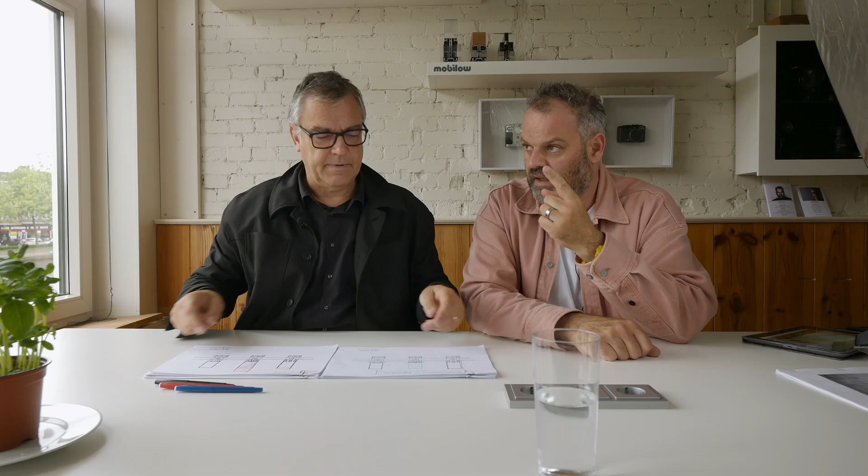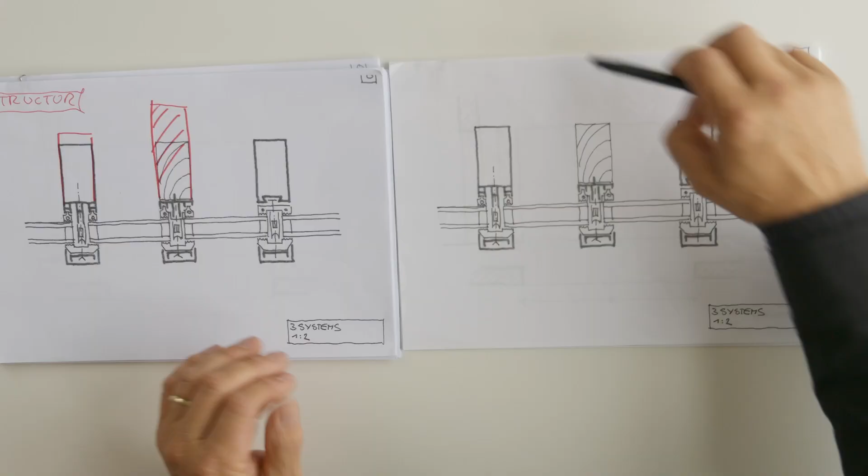And burglary. Burglary, precisely. And what I'd like to do now is take care of each comment they gave to us and get them into our final details. It's the updated version. And here we talked about the different systems, the aluminium, the timber and the steel system.

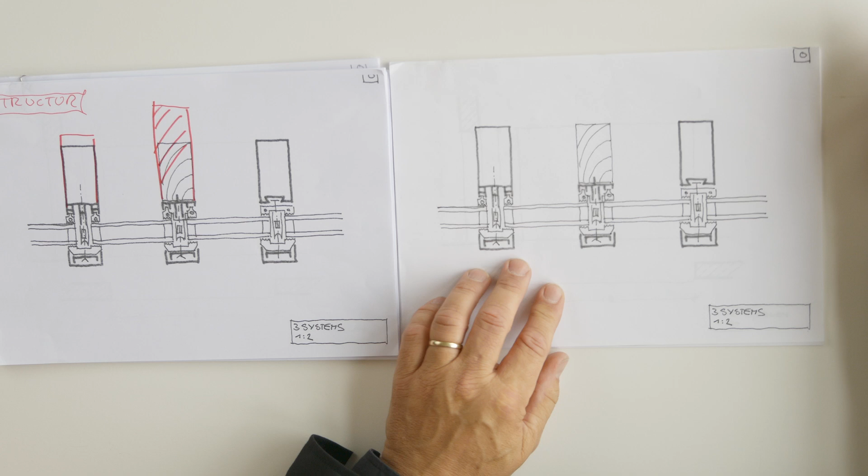And he was very clear saying steel is the narrowest, aluminium a bit wider, and timber would be the largest. And he also defined, okay, if you go into the catalogs, identify the height, 4 meters in our case, you end up with a certain dimension, which we may have to integrate. So when we looked at the catalog, we ended up with 15 centimeters. Good. 150 millimeters, perfect. Here we have a result, which is exactly what we wanted. We need this kind of feedback to identify what's the setup we are dealing with.

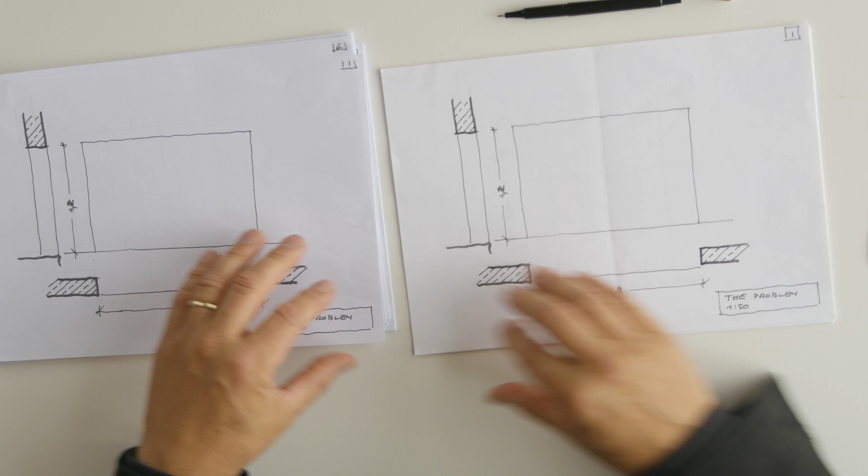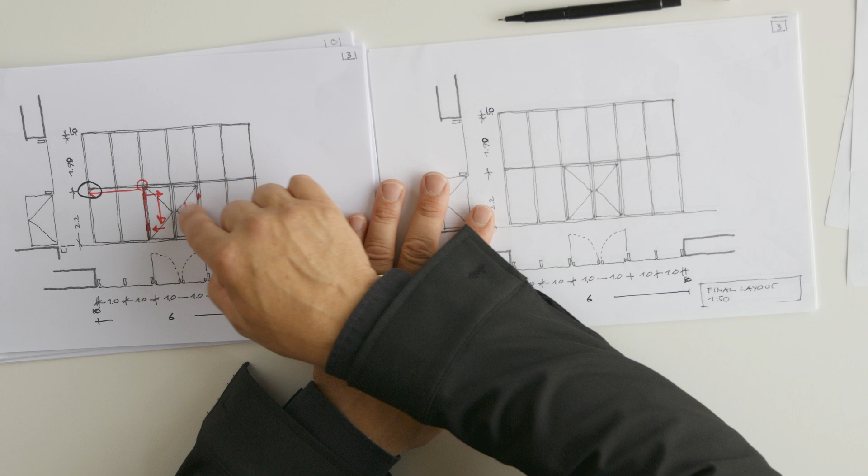Now, next, he didn't have any comments on the global geometry. Neither on the grid, precisely. Fine for him. We discussed the tolerances. He was absolutely okay with our choices of giving it some tolerances. And then, this was an interesting one, identifying where the loads find their way down. So down the loads from the doors, which is why we're going to have some kind of interlock here, which we see in a second.

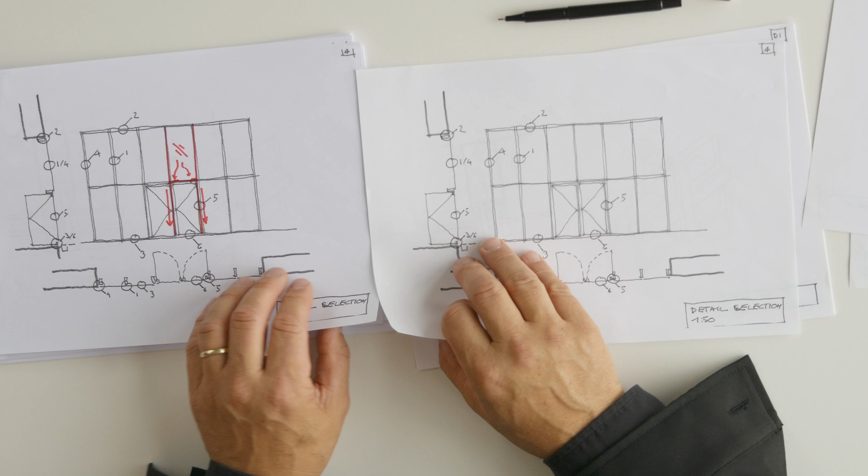And then we discussed also the weight of certain facade components, which means that weight from here needs to be transported and then down in the system, which we're going to see in the main facade detail in a second. Here we go. Well, that was an interesting one. Yeah. Go on.

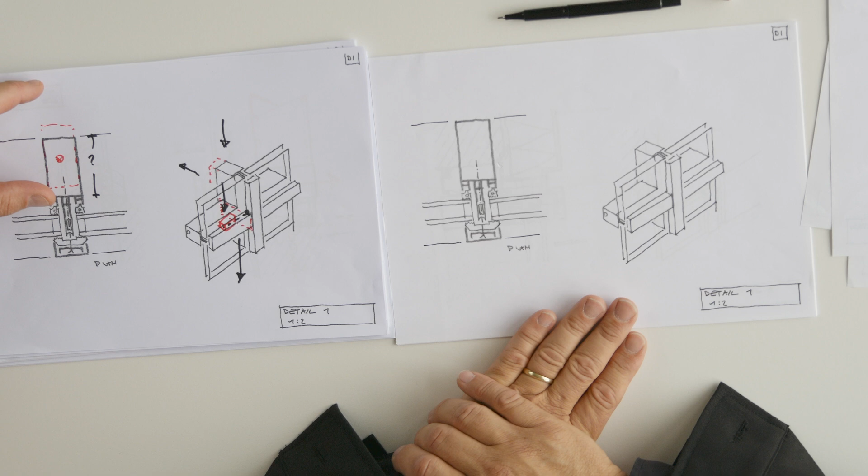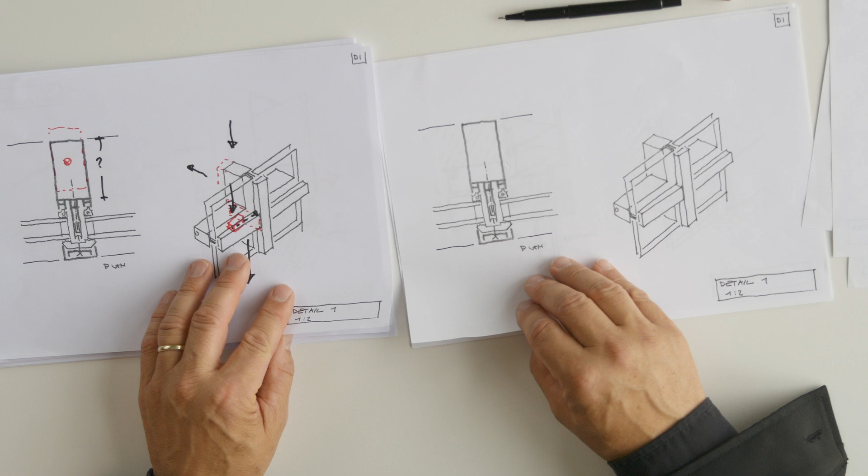Yes, the glass in principle is taking its load on these little glass blocks. They're not visible in the section. And then it also defines how deep the transoms or the mullions will be, to take deflection and deformation from the load of the glass. And then the interlock between horizontal and vertical components is again something which is solved within the system. So each system has a different kind of interlock, as we saw in the previous videotapes from the system suppliers. That's mainly it. Okay, no direct comment here.

Oh, this is upside down. Sorry for that. This was the top part. Interesting one. We discussed concrete may move versus facade being in position because of deformation of the building. We don't want the concrete giving its load to the facade. Erwin mentioned that it is dealt with by creating a sort of telescopic connection. So the mullion of the facade sticks out a little bit higher than the transom.

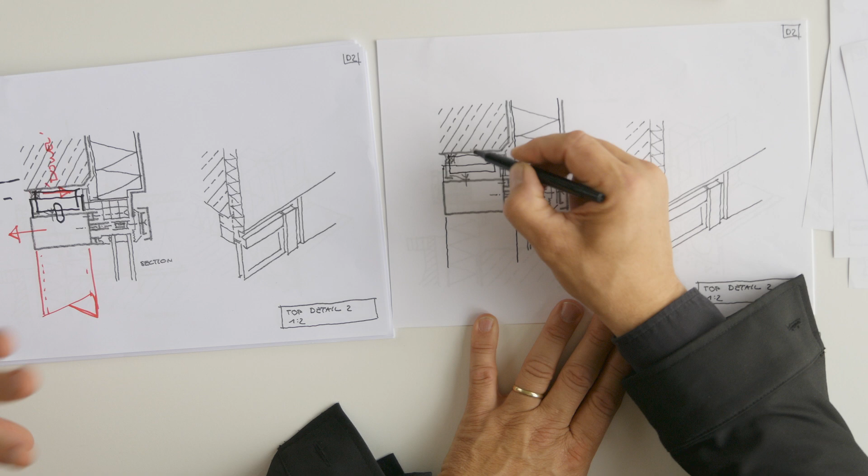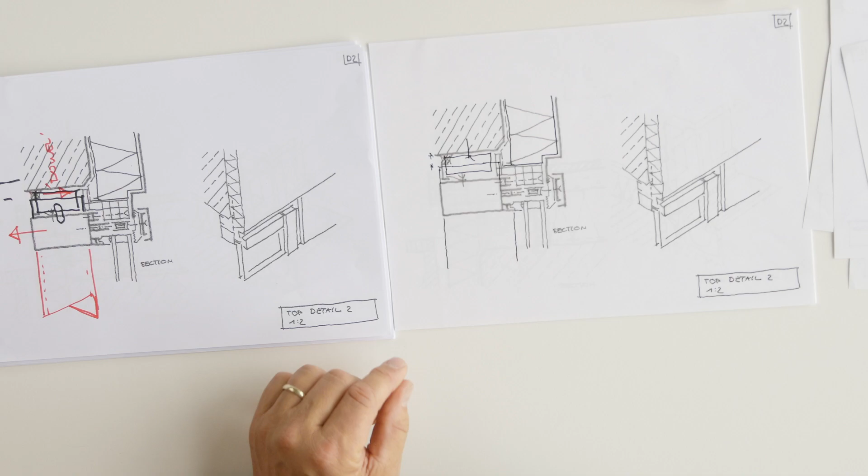And then there is a point that is attached to the concrete on top that grabs into the transom and secures the facade to not move inside or outside, but can actually allow movement from the beam on top or the opening of the building. So we have a certain dimension of tolerances possibly here, and then this is a dowel situation, as he named it. Yeah, a dowel, precisely. And this is a standing facade. And then on top it's a flexible joint.

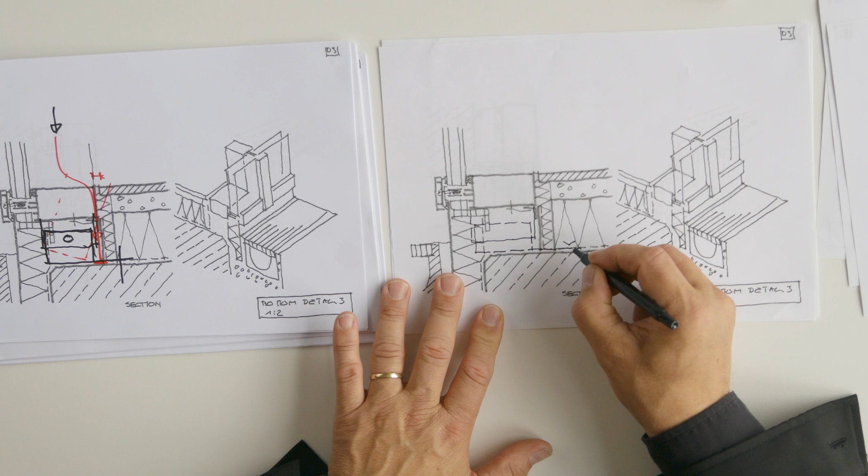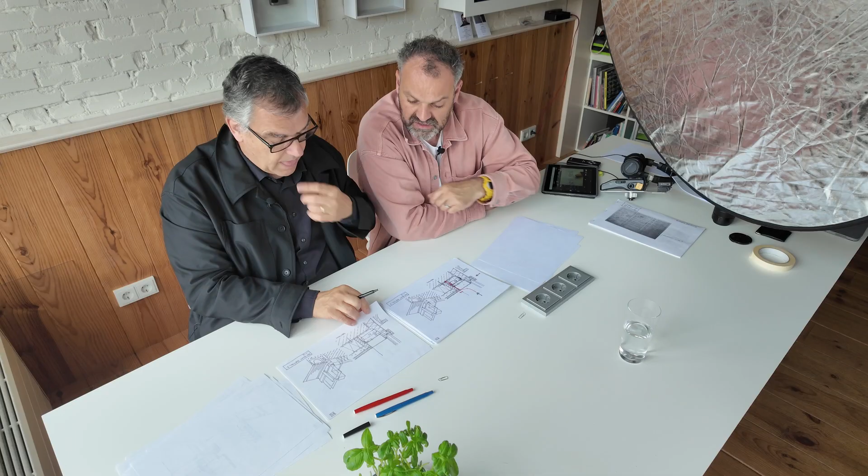Top flexible joint brings us to the bottom. It's the same here. The mullion actually extends a little bit over the transom, and then there's a steel shoe or a bracket fixed to the concrete floor, and that is then also secured permanently. There's no movement in this point. This is fixed. The facade stands on its feet on the concrete floor. Often in construction details they are dotted because they are only every now and then, let's say every meter or depending on the grid. And later on we will also hear from the expert that there needs to be insulation in there.

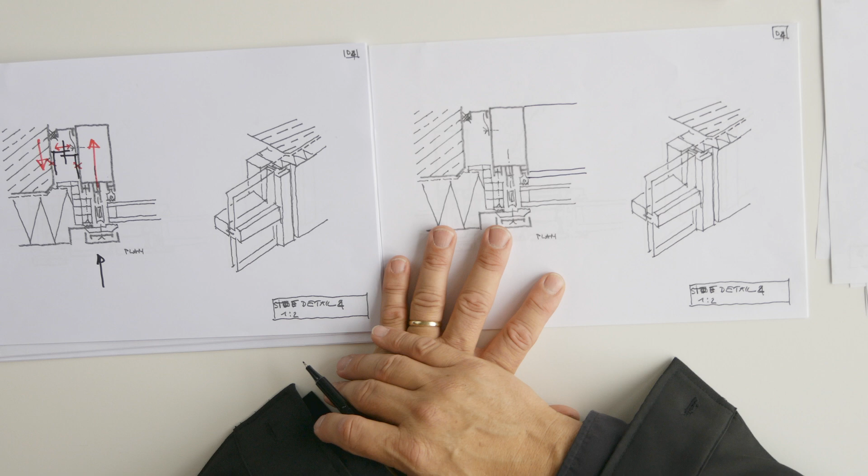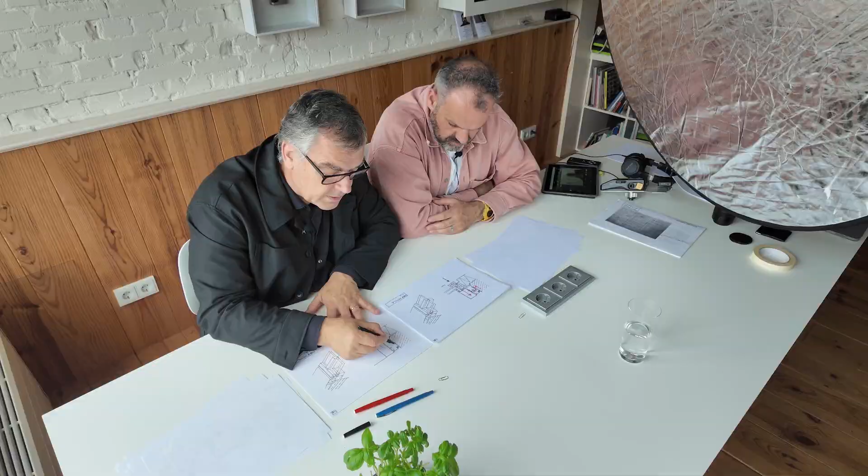This was the horizontal connection, so the horizontal stick system, which has its horizontal lines here, which is then, by the dowel, as we saw, delivering horizontal forces to this system. And he also argued that it's maybe necessary to secure that the facade itself is stiff and fixed to the outer wall. So what kind of material are we going to take here? Yeah, this is, I think, steel.

I would, for instance, leave that open to the facade contractor. They have their own systems. They prefer those systems from the system suppliers. But in general, a metal, steel L profile already does the job. Now it's in here, dotted again, because it's not going to happen continuously. It's going to be every meter.

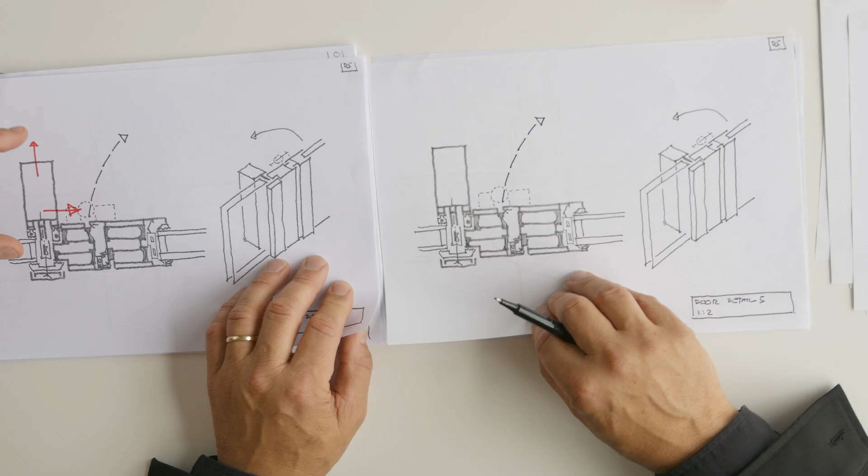Again, we talked about the forces and the consequences of this one, and then fixed this facade too. What was interesting is that he already mentioned, hey, take into account that often the door itself, with different parameters to be taken care of in the glass, may become heavier than the insulating glass units left and right of it. So therefore, make sure that the mullions of the facade can handle these loads, and often they will be defining the overall dimension. So make sure you already know which doors have to be integrated and which functions they have to fulfill. Which is what we did here.

Precisely. And then we end with this detail. No additional comments from this expert. Brings us to building physics. Yeah. So we do the same round again. Building physics, that's an interesting one.

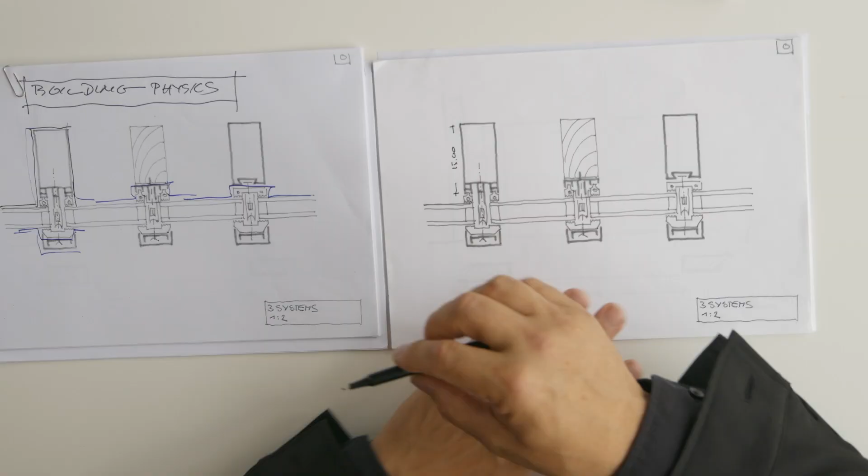So Alessandra evaluated our line of defenses, the inner one which is air tightness, the outer one which is rain tightness, and the middle one which is insulation. She was quite happy because the system provider already takes care of that. That's a standard detail, and therefore Schüco, in this case the system provider, took care of all of that already within the standard setting. Grid, no additional comments. Tolerances, no comments from her side.

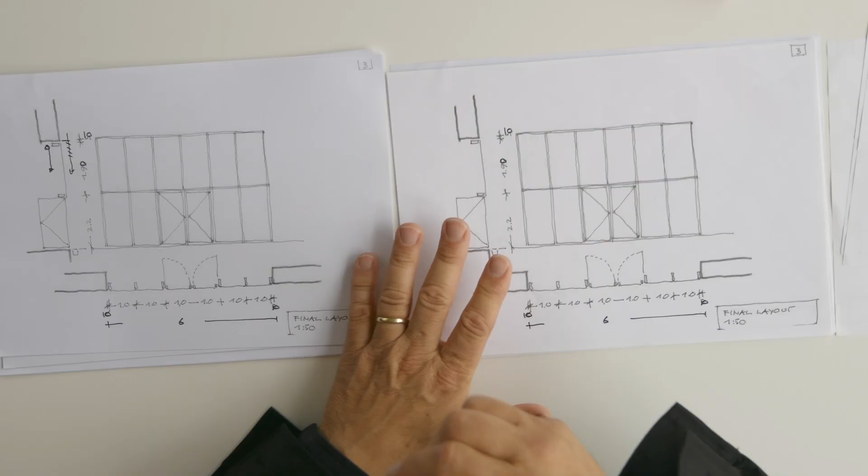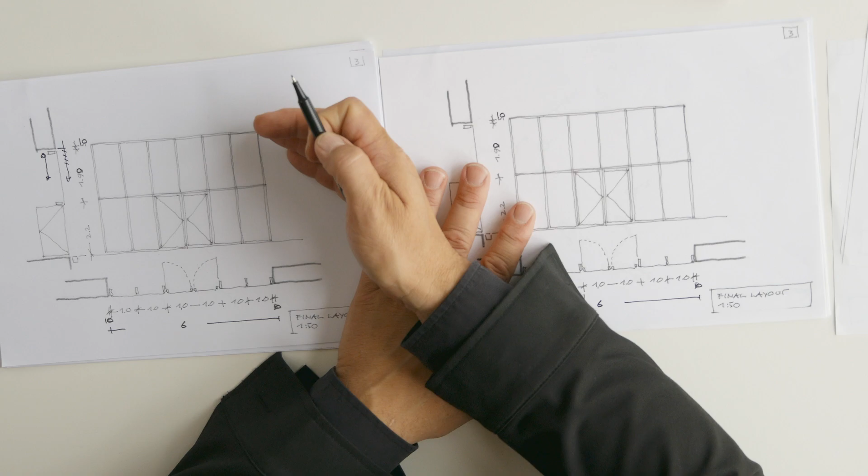Here we started talking about shading. We asked what kind of opportunities we would need to take into consideration for shading. The first one is having an outer shading system, which creates enough shade for the facade itself. She explained the values. An inner shading system has less potential to serve. But we also defined a Northern Hemisphere project, north-oriented facade. It's a north facade in this case. We don't need an exterior sunshade here. So we actually skip this complexity.

Yeah. But always make sure sun shading is a key part of the design of the building. And there's pros and cons for the various different systems. You have to make sure that you deal with that, otherwise you have problems later on with the climate concept. But it's not part of this lecture.

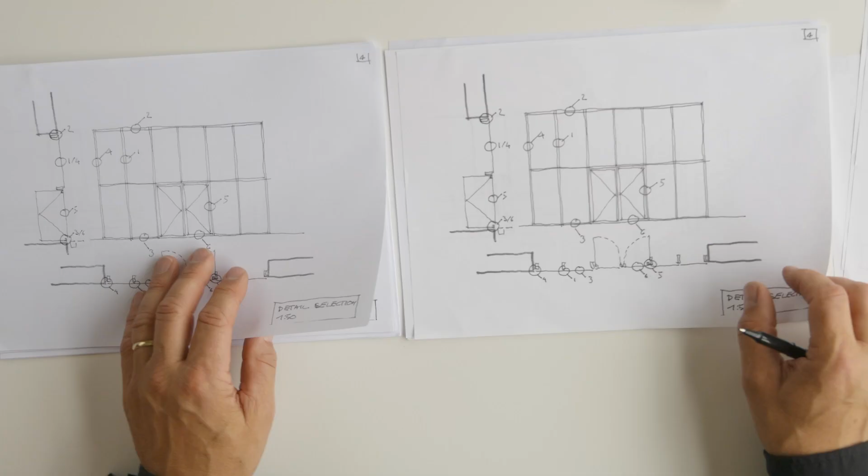I finished with this detail. Here we again talked about the shading, and she also came with the opportunity of having some kind of coatings depending on position. So if you cannot deal with a shading device inside, outside, movable or something, you may end up with a certain coating. That's what she was talking about in that interview.

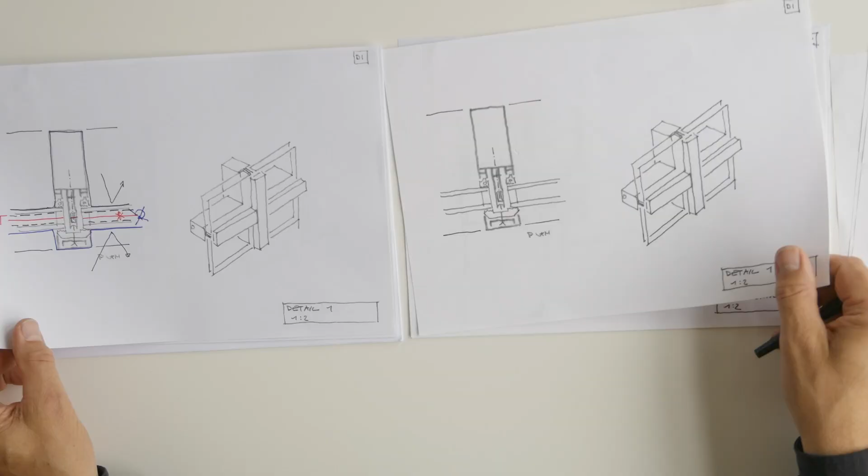Then we continued following the line of defenses. The inner one, correct. The outer one, correct. The red one, which is the one for securing thermal insulation as a setting. This was fine for her. She had no additional comments. Same for the bottom part. We had some discussion if we're going to fill this void or keep it open. We ended up keeping it open, but you may also fill this void, as this is the main insulation for the house.

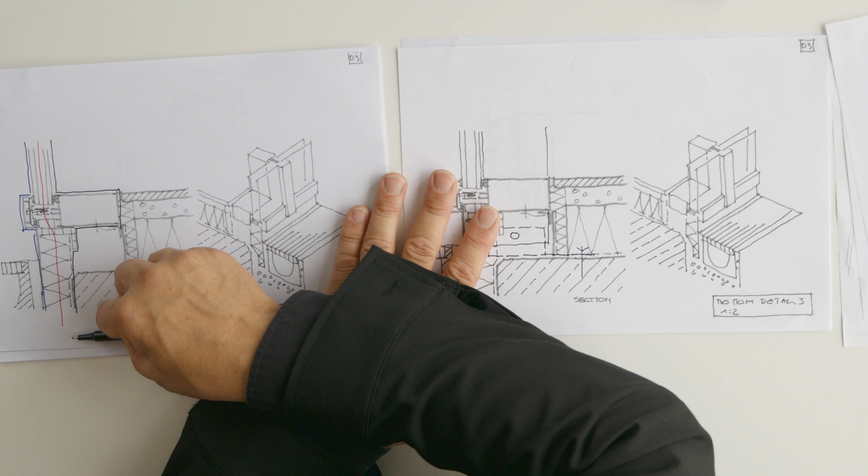What was interesting is she already mentioned within our little sketches of the details that brackets and systems provided by the system supplier to connect the facade to the building already take care of good insulation. You can see this in these various chambers. It's a plastic material which has a certain conductivity, but in this case it's perforated in order to make sure that it is as good insulating as possible.

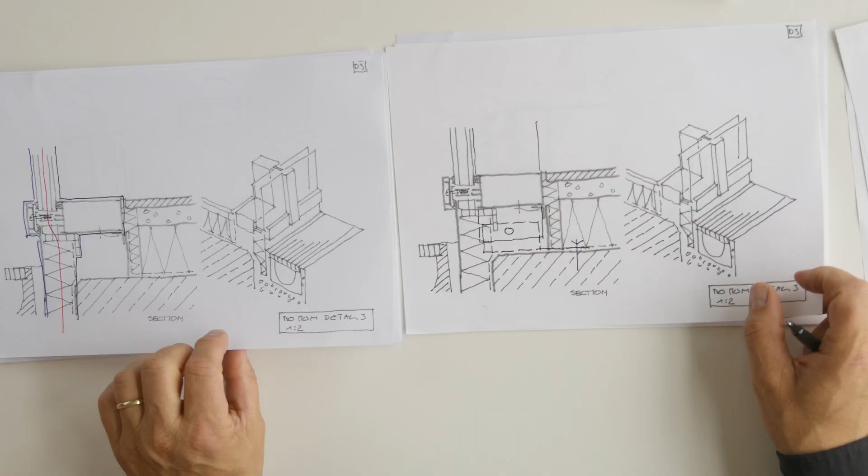No comments here. This was an interesting one when we were talking about acoustics for the facade. So we have this normal stick system with an IGU with 2 layers of glass. If acoustically this needs to be improved, we can go for different thicknesses for the glass itself, or even go for a triple IGU, which also helps to improve the U value. When you look at the details here, you see the size of the IGU. This could be a triple one. This is for sure 2 layers of an IGU.

So that worked nicely. And then for the door details, no additional comments from his side because we actually follow the system. So building physics, done, check. Quite interesting how many factors you actually have to take care of. That should be integrated from the very beginning in a description of the performances of the building. As we are teachers, luckily we didn't get that many serious comments.

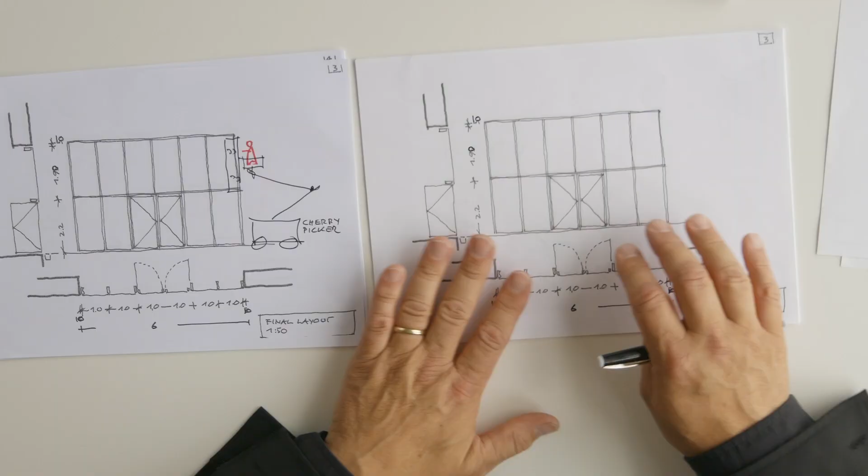Okay. Additional aspects: impact, construction at site, things like this. Again, Erwin, no comments to this, no comments to this, no comments to the general grid system. He did not have any difficulties with the tolerances. He was very happy with us having tolerances already integrated. And now how do we get this really installed? This was an interesting one. We discussed how do we do this.

So we have this opening, it's 4 meters high, no one will be able to get to the top part. You will need something to reach a certain height. A scaffolding system in front of it directly creates the problem of getting the glass units integrated. So he ended up saying, well, a cherry picker, so a device which moves in front of it.

Could also be a scissor lift, for instance, that is movable. But what he also mentioned was take care of the installment of the facade profile itself, the system, the stick system, and then also think about how to attach the glass, because it's different activities that have to happen, and also for the glass installment, they come with the special mounting system with the suction cups to put it in place.

Yeah, precisely. Important to consider that you need to have space in front of the facade, and it needs to be solid enough to allow certain accessibility, and the load-bearing field in front of the building often is still mud or something like that. Make sure you have to do something.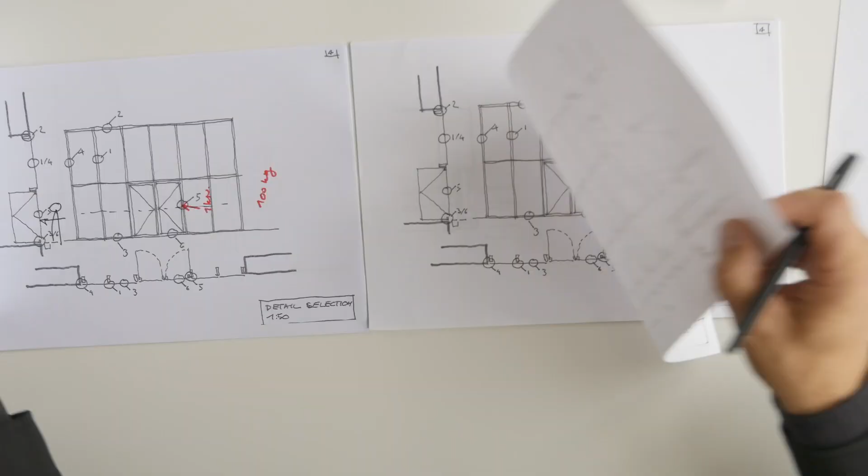Precisely. Then horizontal impact. We took the next drawing to do so, which means you have a person who's somehow bouncing into the facade. This is defined with 100 kilo horizontal impact, normally taken care of by the system. So again, a topic to be considered when you decide the system and when you go into the system descriptions, that you can identify that this is the load the system can actually accept.

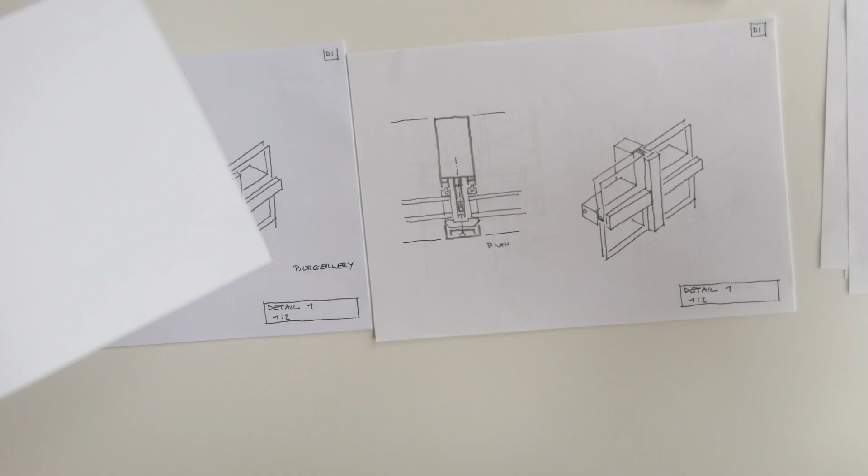Next one. That was an interesting one. Burglary. How do you get into such a facade? You actually can break every facade all the time. Yeah. And we learned the main topic is to make it complicated, so to delay the time people can break in. So he came up with alternative fixing devices.

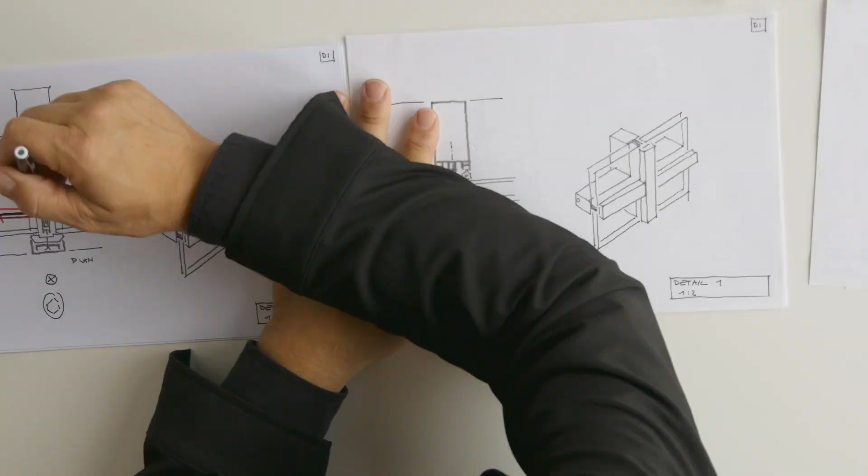So when we again look at this system, and we remember there's a screw in here, having different types of screws being positioned there, and if you don't want to break the glass, you may have laminated glass sheets which then are maybe even fixed to the system, not in this detail, but again, system suppliers deliver different qualities, different performances.

Well, I was wondering, we haven't talked about that, but a student recently asked me, what if the facade isn't strong enough, but you have to protect, for instance, an embassy? When someone drives into the building with a truck, how do you do that? Then you make a super heavy facade, or are there other ideas? At certain points there's a limit. So you cannot solve this within the facade system. So you have to find alternative solutions.

Like? For example, concrete blocks, solid structure in front of the building. So you make sure that the truck can't reach the facade. Okay, but then it stops here at the facade, then it's the landscape architecture who has to take care of that. That's absolutely correct. This is not our business in that respect.

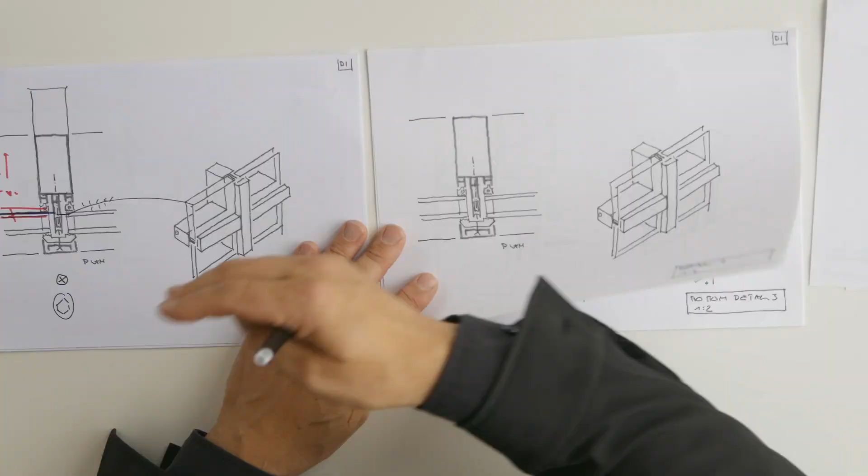We also did talk about bomb blasting. That's a different one. Here we want to have the facade being soft enough to, in case of explosion, take the impact. We defined for this project, it's not an embassy, so we're not going to take care of this kind of question.

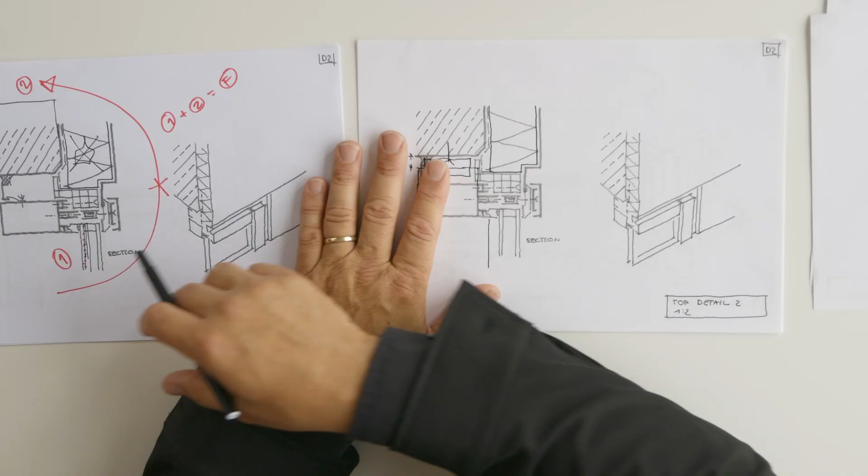Fire, another interesting one. We discussed the fire situation. Normally in low-rise buildings internationally, you can accept that there's a fire here, but you have to take care that the fire does not directly go up. If it is a high rise, you may have to do some additional measures. Normally we say kind of a meter distance in the parapet, for instance, concrete, that is able to withstand the fire. If it's a bit more advanced, you may also do a sprinkler here to cool down the fire outside.

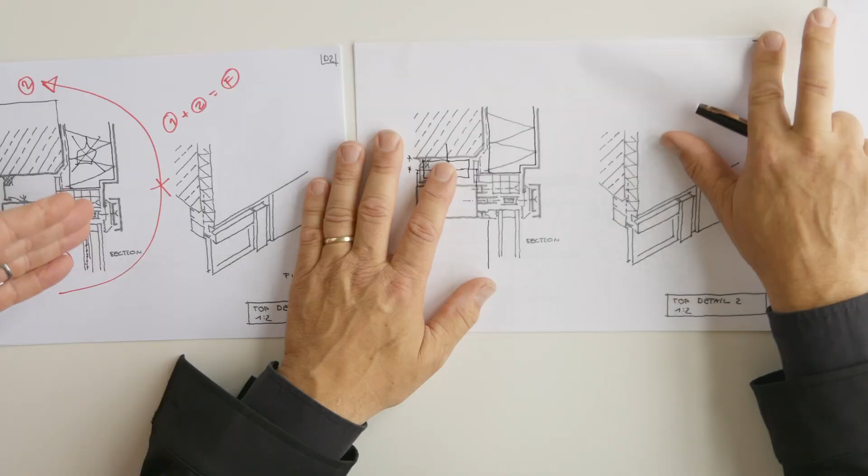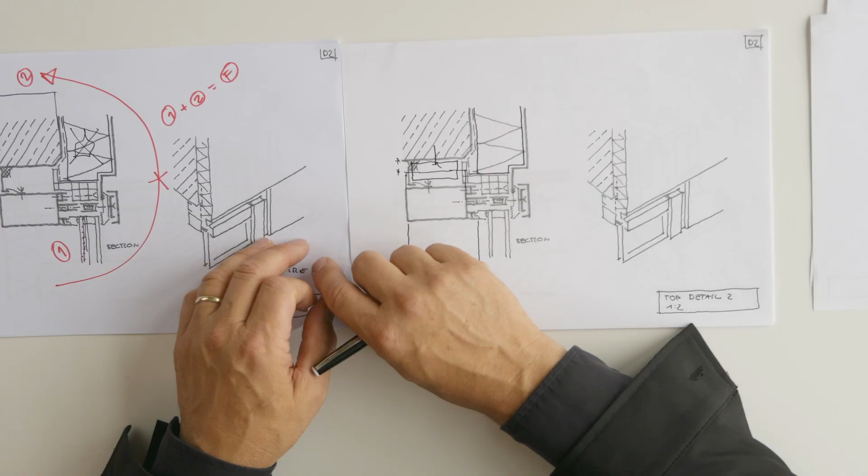What about smoke? That was interesting because imagine there's no fire at the facade, but in the office underneath, and there's a quick development of smoke that could find its way within these interfaces and connections into the room above. You have to make sure that all the details are closed and sealed so the smoke will not enter the room above. Again, systems do give information on this topic, and for high rises you may have to go for a different system, or place additional non-combustible materials in here.

Right. Bottom part, no specific comment from his side on additional aspects. And side detail, nothing specific. The door detail, we already talked about the loads to be taken, and the horizontal door detail, nothing specific here. So by that, we close this chapter of engineers commenting and conclude. Now we have a designed and engineered facade with comments from our specialists taken care of. The next step would be to get this into a tender process, asking construction companies to bid on this.